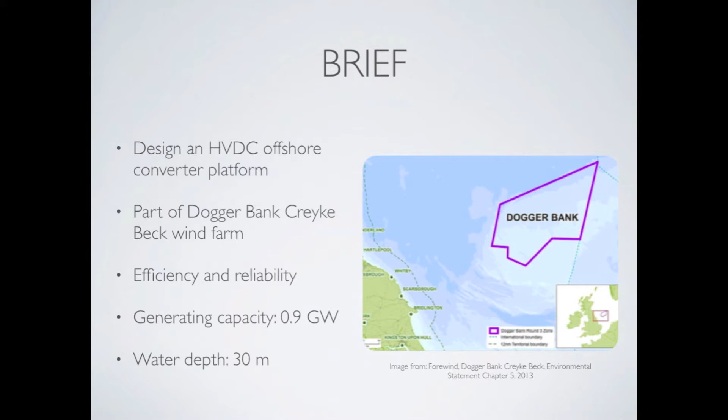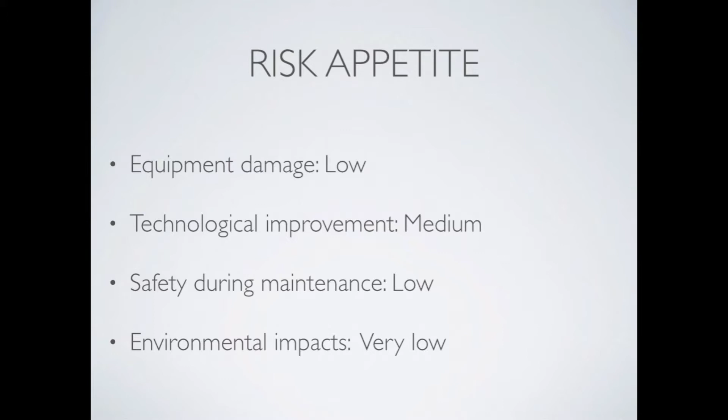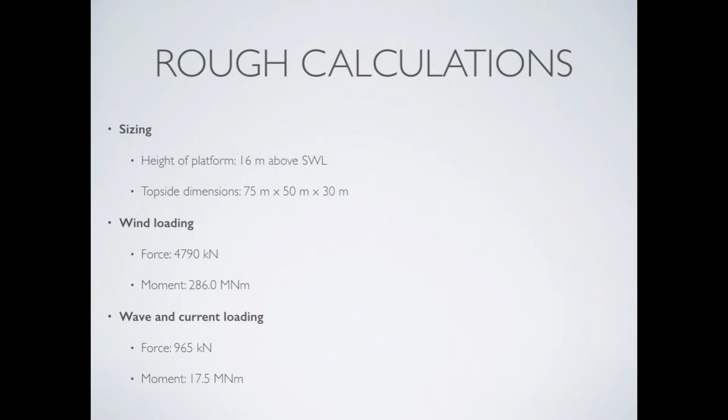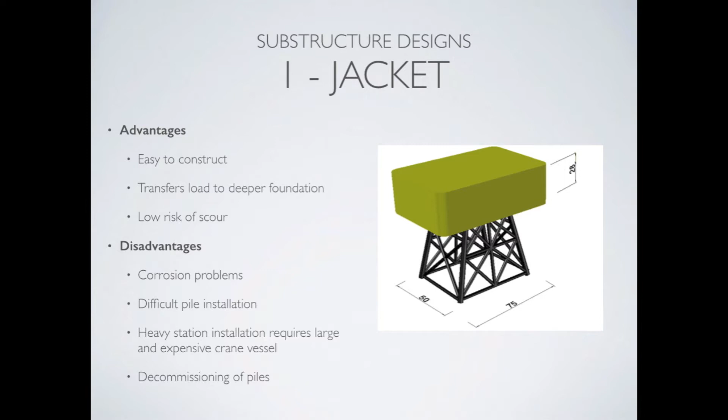The first design is a jacket, which is a steel truss structure. The jacket is constructed onshore and shipped to the desired location. Once the structure is in position, the piled foundations are installed. Finally, the topside structure is lifted into place. The disadvantages of the jacket structure are mainly related to difficulties in the pile installation and corrosion.

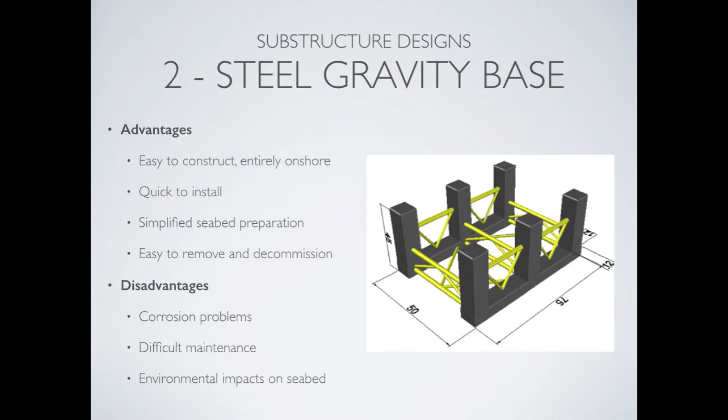The next design is a gravity-based structure. The columns will be made of hollow steel to ensure that the structure floats. The structure will be built onshore, floated to position, and sunk by self-weight and ballasting. This structure's advantages include simple construction, quick installation, easy removal and decommissioning. However, it requires a scour blanket and can suffer from corrosion.

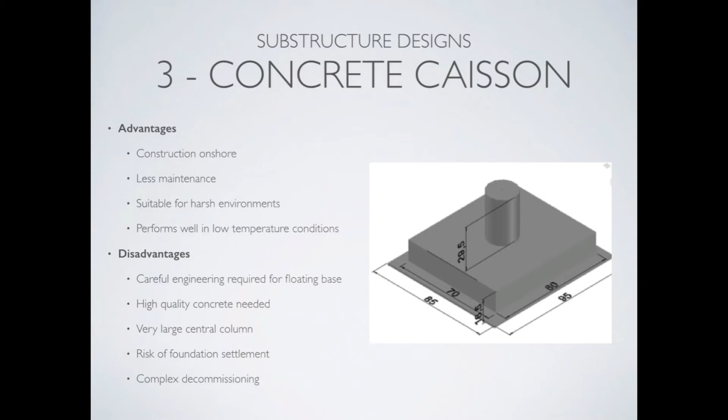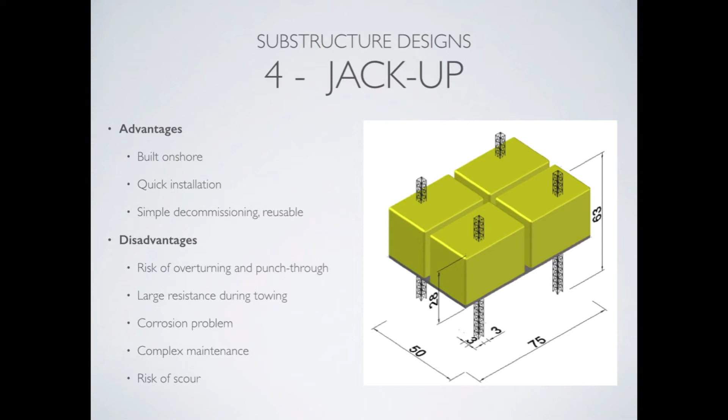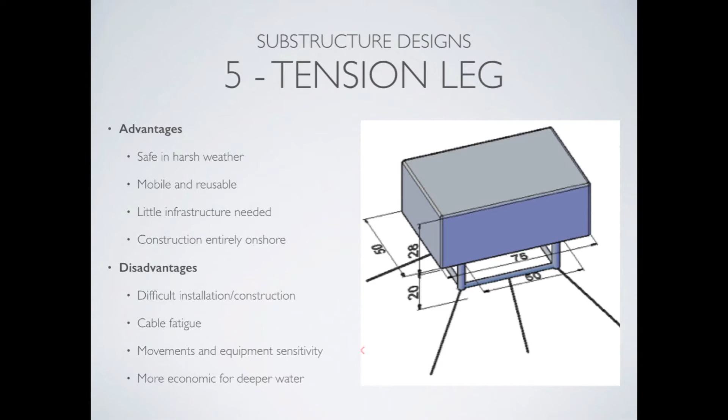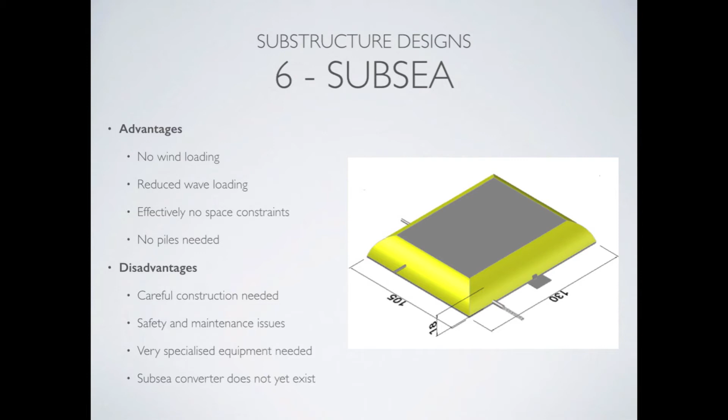The subsea solution is one where the HVDC components are placed on the seabed. This structure has no space constraints and eliminates most external loading. However, construction, installation, and maintenance are highly complex. Unfortunately, the technology for a subsea HVDC converter does not yet exist.

We have developed 3 different designs for our topsides. Our first topside proposal is a simple large box with rounded corners which houses all the required equipment. This solution is spacious and provides easy access to the whole converter. The disadvantages are mainly related to high wind loading.

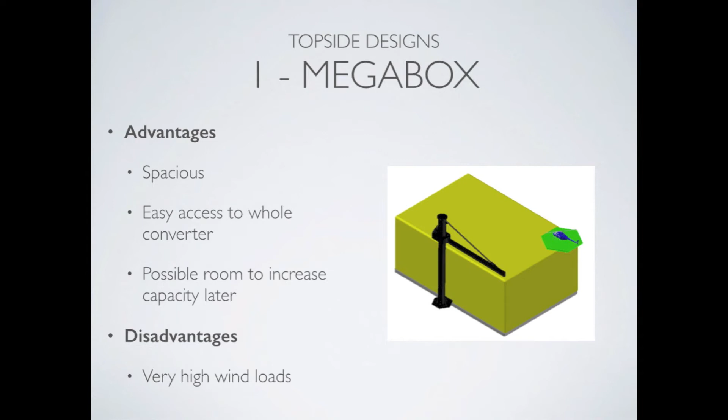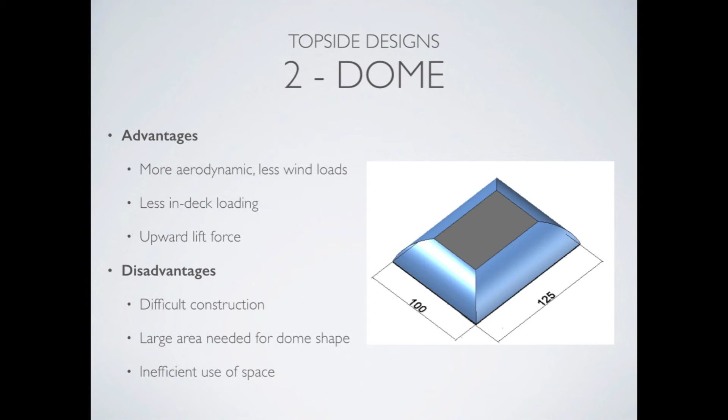Our second design is a dome shape. The dome design would significantly reduce the wind load. However, construction and installation would become more difficult. The aerodynamic shape would reduce in-deck loading and drag force. However, construction of the dome is complicated and requires a large surface area.

The box unit design consists of several box units with rounded corners, aiming to reduce the wind loading taken by the structure. This solution would have a higher deck area to substructure ratio, but construction is more complex and connections between units can be very problematic.

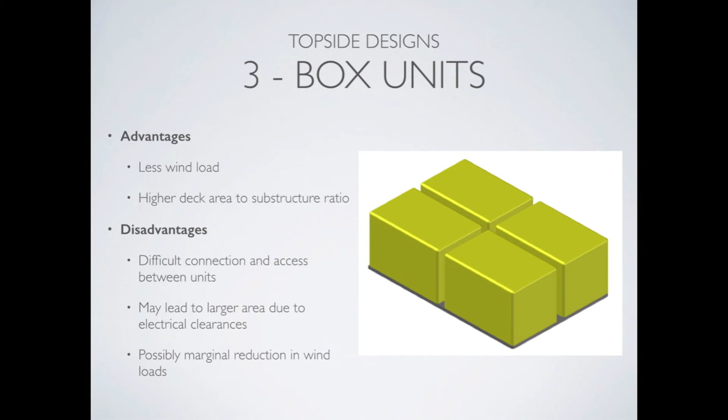The construction and installation phase is a crucial part of the project. The electrical equipment is very sensitive to movement and will need to be secure during transport. There should be no installation of electrical equipment offshore. The crane vessel required to lift the topsides offshore is one of the largest in the world and its availability is limited. Therefore, it is best to eliminate or reduce dependency on such vessels.

Shallow foundations generate minimal installation noise, but may not provide enough tension and lateral load capacity. The foundations applicable to our designs are concrete gravity foundations for the gravity structure and jacket structure, suction caissons installed by self-weight and suction by providing differential pressure, and jack-up connections for the jack-up structure.

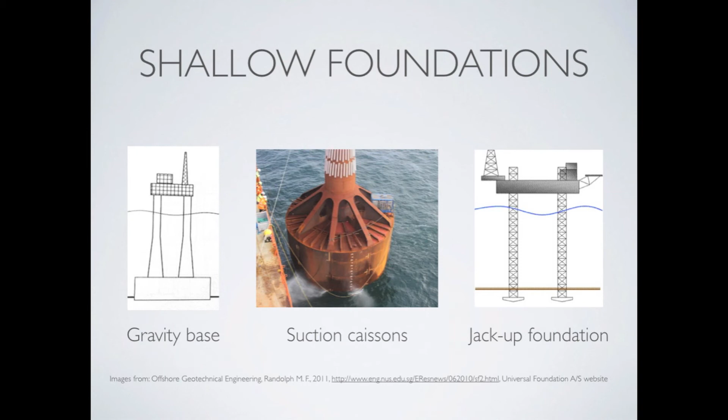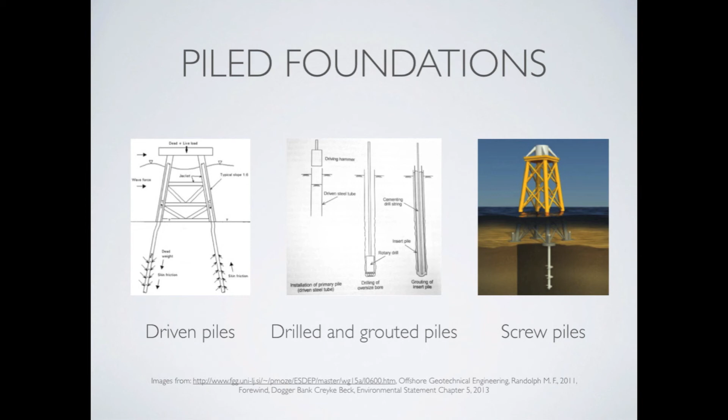Deep piled foundations are often used when soil strength increases with depth, which is the case on site. We considered 3 types of piles: driven, drilled and grouted, and screw piles. After thorough research, we believe driven piles would be the most adequate option for our situation. Driven piles are by far the most used foundation option for offshore structures.

In order to decide which foundation option is the most adequate for a particular substructure design, we will need to perform further calculations and research so as to optimize numerous parameters including cost, reliability, easiness of installation, environmental impact, and of course resistance to axial and lateral loadings.

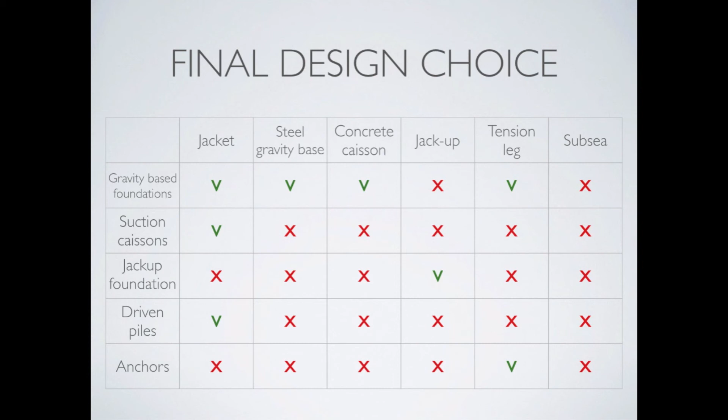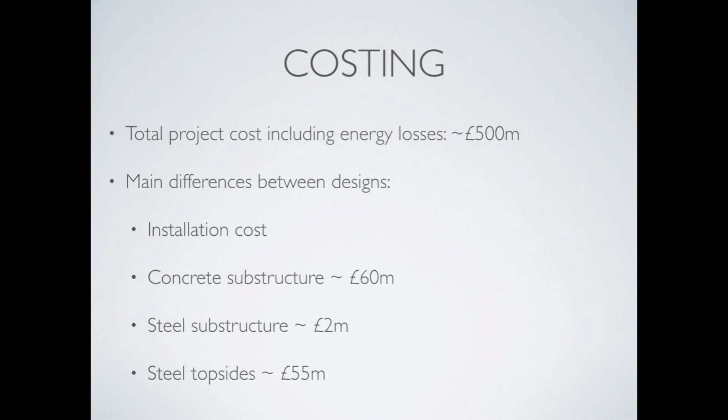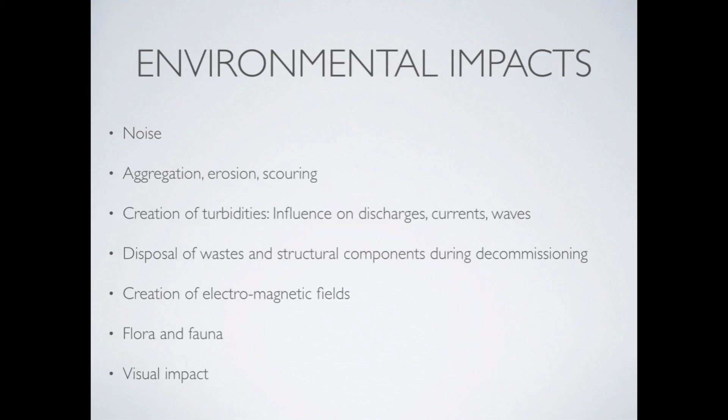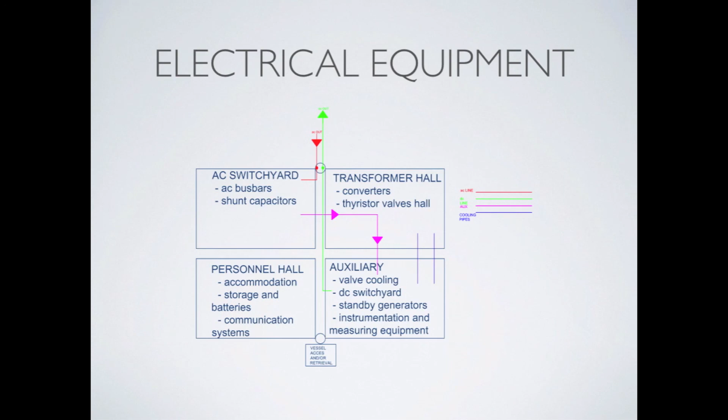A possible top deck layout is shown here. A hall is reserved for the AC switchyard that connects to the transformer hall. This feeds into the DC switchyard that sends the DC current onshore. The final compartment is reserved for the maintenance personnel. A system of vessel access and retrieval is provided. This is an initial layout that will be improved as time progresses.

Moving forward, Team MVP recommends the following. In terms of the substructure used, we believe that the most viable options are the steel jacket and the steel gravity-based structure. Both of these options have been used successfully in the field of HVDC offshore. The topside designs we will be moving forward with are the mega box and the box subunits. Refining these options will enable us to provide the best possible design.